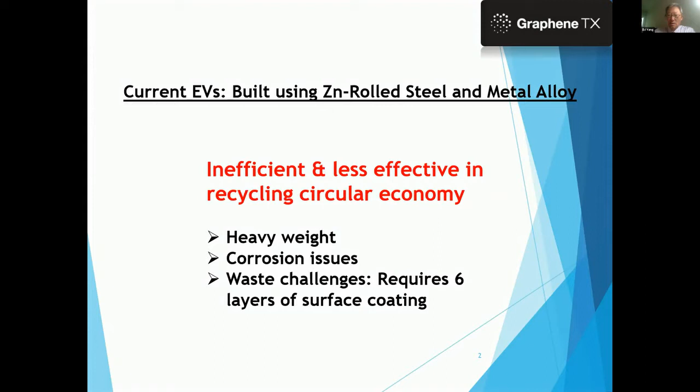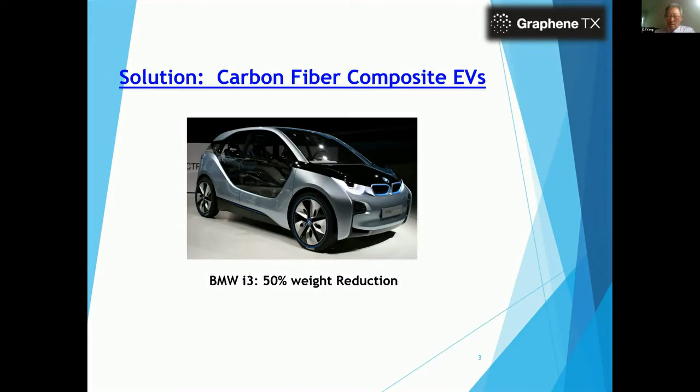So it's not really a recycling circular economy yet. There's a solution. This is the BMW i3, introduced I think a few years ago, around 2013. These are carbon fiber composite cars, and they said it is as strong as steel, and also it's lightweight.

Since it's a 50% weight reduction, you can improve battery mileage twofold since you are reducing the weight by half. And also, since this is a composite car, you don't have to worry about corrosion, so it has a long use life. However, there are still problems.

It's high cost, especially due to the high price of carbon fiber. Epoxy resin is very cheap, but carbon fiber is very expensive. Another problem is using composite, the appearance is not that good, and also poor distinctness of image. I believe our product can solve these problems.

So this is the way to solve the high cost carbon fiber problem. As you know, since PAN-based polyacrylonitrile-based carbon fiber was introduced in the late 60s, every carbon fiber manufacturer is in a way using PAN-based solution spinning to make carbon fiber. It involves 6 steps, and also requires high investment.

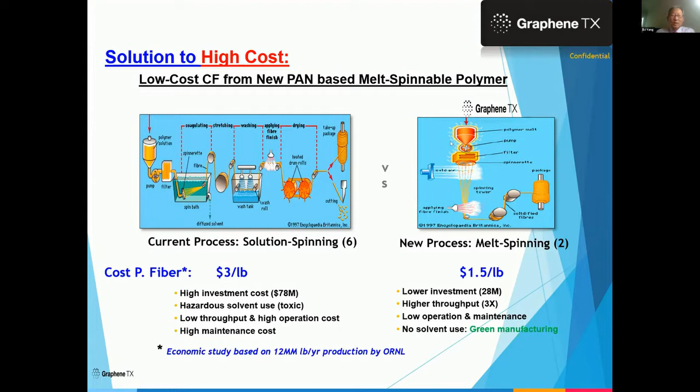Here I just want to show ours, still it's PAN-based, but we have an additional monomer. So I'd like to show the melt spinning here. This is just a laboratory unit. Of course, next stage, we will do multiple filament melt spinning, probably at Oak Ridge National Lab.

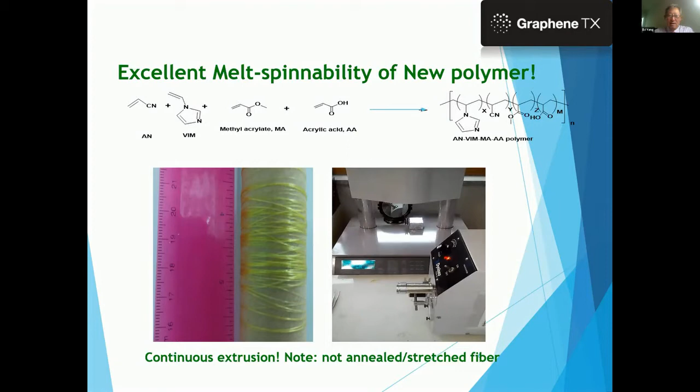Then you say, why is it melt spinnable? Because we developed the technology to create a so-called glass transition temperature. Regular copolymer PAN or PAN polymer they use, they don't have a Tg. But as you can see here, it's reproducible, and we have a glass transition temperature at 95 degrees C. So we have 2 different phases, and that's why we will be able to melt spin.

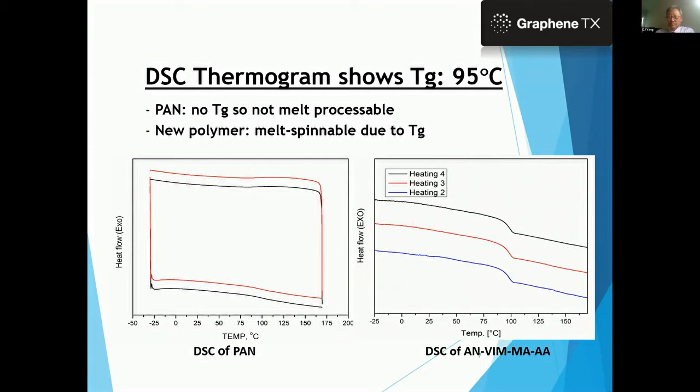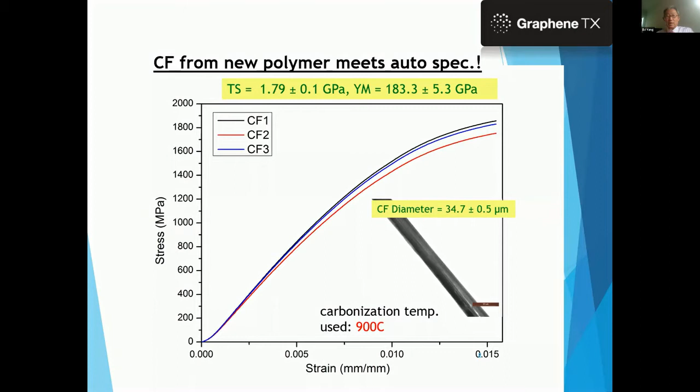So as you can see, we can handle the high cost problem, but the second problem, the reason why it has a less appealing appearance as well as poor distinctness of image, is due to moisture. Composite compared to metal loves to absorb moisture, and also polymer has UV sunlight damage, and also polymer is not conductive, so they are static.

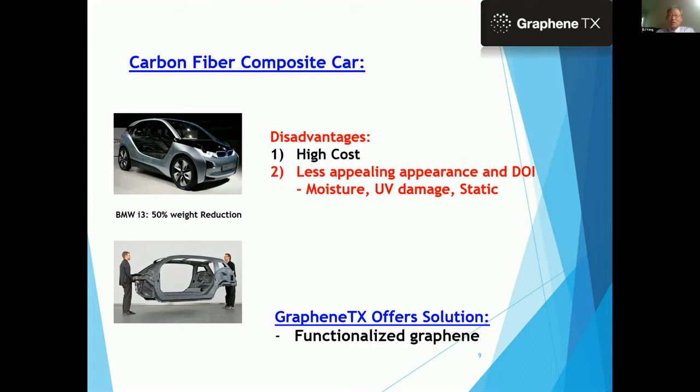So I will show you we can alleviate some of this problem, or we can solve this problem. We need to develop lots of data, but I'd like to show you the preliminary data. As you can see, if you add just 1% aminated graphene epoxy, you will see an increase of hydrophobicity.

Theoretically, 1 gram of graphene can cover 2,630 square meters. So if you put it in the composite, there are multiple layers of graphene, and they will protect against the moisture problem.

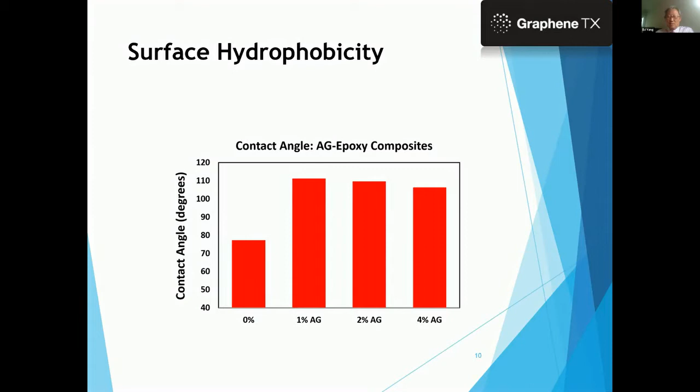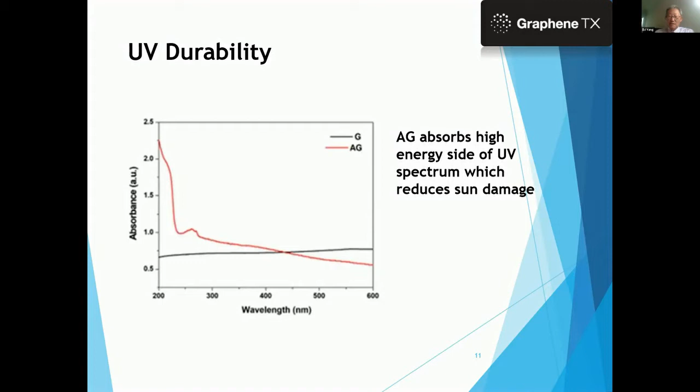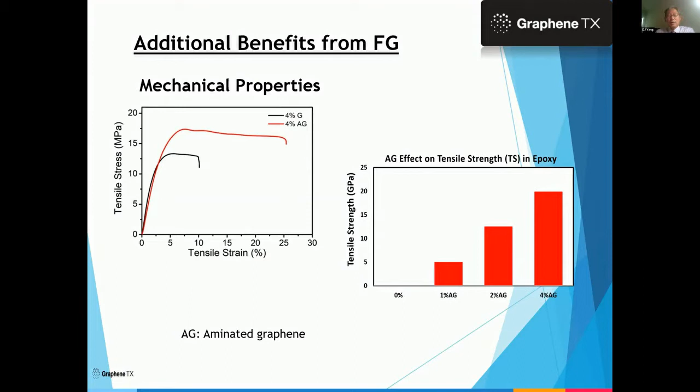If you just use pristine graphene, it is just a physical mixing. There is no chemical bonding between graphene and epoxy. But if you use aminated graphene, the amine group reacts with the epoxy group, there is a ring opening, and then it forms a carbon and nitrogen bond. So it gives you a strong chemical bonding we call covalent bond. That's why it enhances mechanical properties.

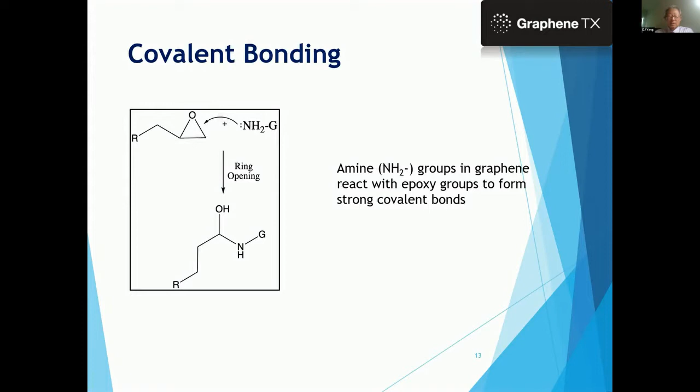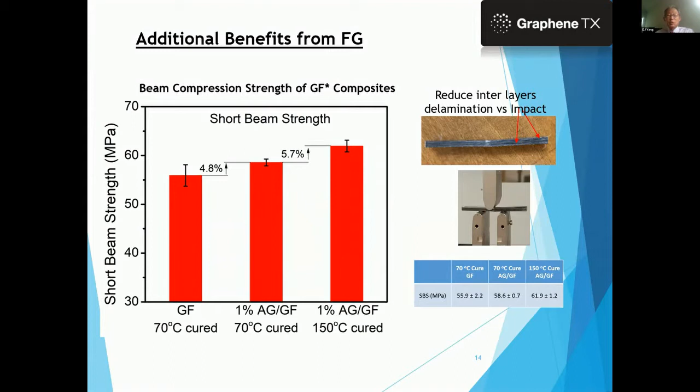Another test we did is the so-called compression strength test. We add just 1% of aminated graphene in epoxy. In this case, it's glass fiber. As you can see, by adding only 1%, you can increase the strength by 10%. That means we will be able to use less fiber when you make a composite.

I already mentioned that by using low-cost carbon fiber precursor, we will be able to solve that high-cost composite problem. Another one is the less appealing appearance problem.

By using aminated graphene, we can solve that. As shown in the mechanical property data, it will enhance the strength. So using low-cost carbon fiber and aminated graphene composite, you will enhance these items. It will be even stronger and even lighter. And since it doesn't absorb moisture, you will have a longer use life of composite cars.

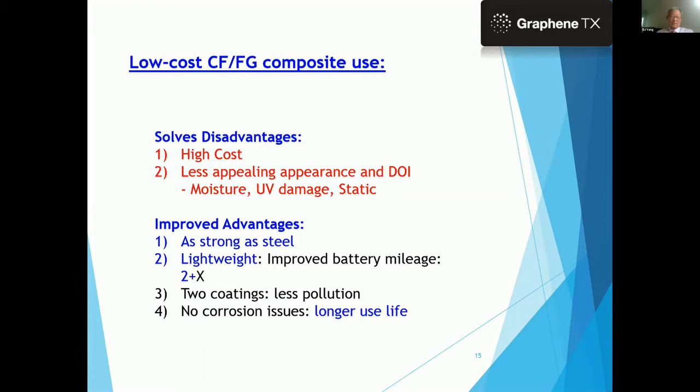So our product can be used in many applications. Currently we offer low-cost carbon fiber precursor technology. We finished a proof of concept in the lab, and we are formulating the next stage by working with IACMI and Oak Ridge National Lab. But currently we are selling aminated graphene, aminated CNT, and alkylated aminated graphene CNT.

Alkylated amine, especially long chain hydrocarbon alkylated amine, is good for non-polar plastics such as polypropylene, TPO, or EPDM, so they can mix well. Also aminated graphene can be used with epoxy resin, as I showed, but also with nylon 6,6 or nylon 6, because that amine group promotes hydrogen bonding. So there are many applications.

As you know, especially offshore wind turbine blades need to be longer and lighter. I was also told that currently the tower is made out of steel, but if they use composite, it can last more than 50, as the engineer told me, it can last 100 years. That means we will have a real saving of maintenance.

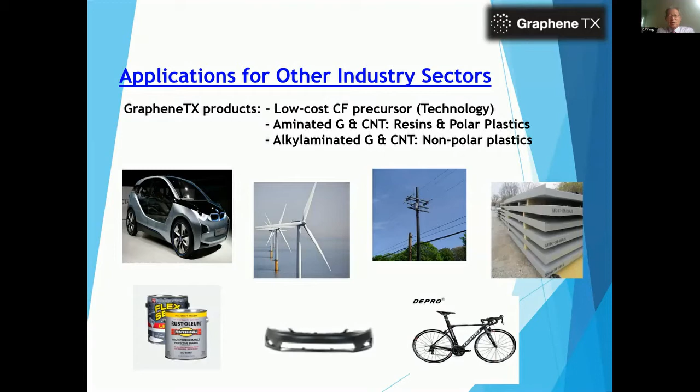Also, if we use this material, low-cost carbon fiber composite with graphene, it can be used in infrastructure and construction. I'll show two examples: utility poles and bridge decks. They can last longer because graphene can be used in other products as well.

So what we are going to do, as I told you, we are already selling graphene products. However, as far as the low-cost carbon fiber project is concerned, we proved it in the laboratory, and here's the next stage of what we are going to do. We are already communicating with Oak Ridge and IACMI.

What we will do is produce a large quantity of polymer at UTD, do a little more optimization study of extrusion, and then provide a large quantity of polymer to Oak Ridge National Lab. By the time we've successfully finished, I believe we will be able to get investment.

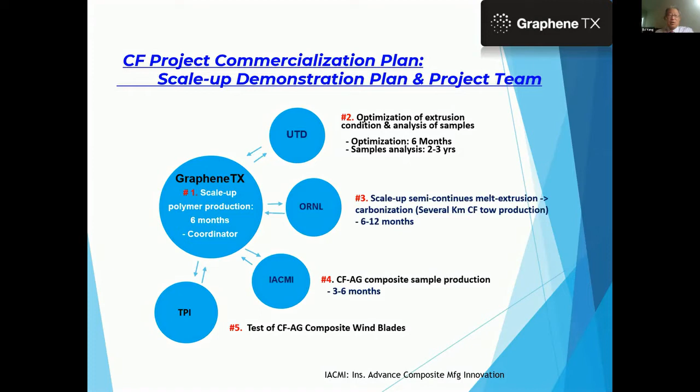Of course, with that carbon fiber produced from Oak Ridge, we can make a composite, and that carbon fiber composite prepreg can be tried with TPI and other automotive companies as well.

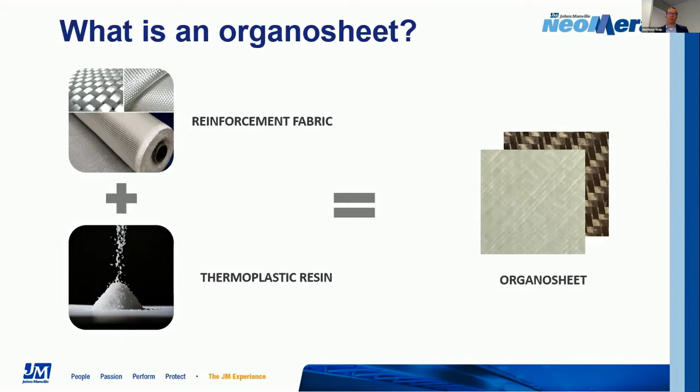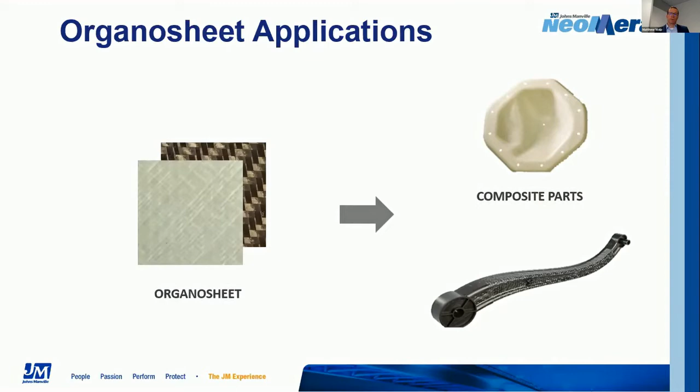And these sheets can be used and processed in a number of different ways. Just as a few examples, you can thermal form them into some sort of standard shapes, and then you can injection over mold them. In this case, the injection over molding process utilizes the organosheet as sort of a structural backbone of that injection molded part. Often injection molded parts can't be used in structural applications, they're either non-structural or semi-structural. This gets you into a more structural material by using all the benefits of injection molding to mold in sorts of features. But then that organosheet gives you kind of a backbone to the material to give it the stiffness or strength requirements that you need.

So what JM does is not melt impregnation for our organosheets. We produce our organosheets in a fundamentally different process, and the story of how we got there, I think, is interesting to share. I think JM is known within the composites industry for quite some time for producing rovings, glass fiber for composites markets. So as a fiber producer, we sell those on to other companies that are going to integrate them into their composite, whether those be thermoplastic or thermoset composites.

And so for a lot of that time, we've been working on sizing development for our fibers. That sizing development is tailored to certain processes and materials to help utilize and best process that fabric. And we developed a number of years ago a product called StarRov 886.

This particular sizing development was designed around the use in AP nylon systems. What we did is develop a sizing that had reactive groups on the surface of the glass to help promote polymerization at the glass surface. That obviously promotes the polymerization process, but also the bonding and the strength of the interface between the fiber and the matrix. So what you would get is the nylon would grow off of that surface, and you get a very strong bond.

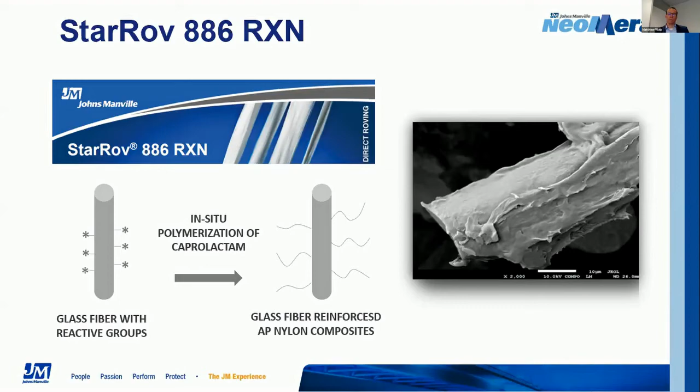This was mainly designed for the RTM industry. With that caprolactam-based system, you've got some reinforcement, and then you've got the resin system. Those are mixed inside of a mold, and you get the polymerization inside the mold itself, and then your part comes out of the mold. It's a very interesting process.

We still sell this material into that application today, but it does bring some challenges. Number one being our part producer, or in many cases our customer, is doing the resin chemistry in their process. For some that can be very doable, and they've developed the capabilities to do that. But many part manufacturers don't have that capability. They don't have that chemistry background, the ability to handle that within their facilities. They're very strong on the part production, but the chemistry side's not so much.

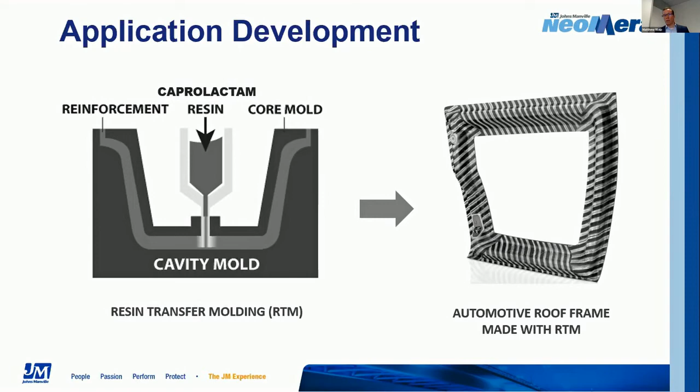So as JM looked at how this technology would grow and how we could potentially do more with it, we started looking beyond just selling it in the RTM space and maybe doing it on our own. This is where we introduce our composite technology, our thermoplastic organosheet technology.

If you're familiar with the RTM process and how AP nylon is produced in that process, first of all, we're running at rather lower temperatures from a thermoplastic standpoint. So right around 90 to 100 degrees C is what we're handling the resin system at. And the resin system at that temperature has a very low viscosity.

It has basically a water-like viscosity to it, which has a huge benefit when we start to think about application into the reinforcement. I use the analogy pretty regularly that if you have a fabric like a jacket or a coat and you pour water on it and it just sort of soaks out the fabric, that's what's really enabled with using such a low viscosity system—that full wet-out of the fabric.

And then once the resin system is within the fabric, it's polymerized into the nylon. So it's nylon 6, a very common, well-known thermoplastic material used in many different places. For our customers and people who use the product, they're not going to really notice any difference between that and a melt impregnation from a polymer standpoint.

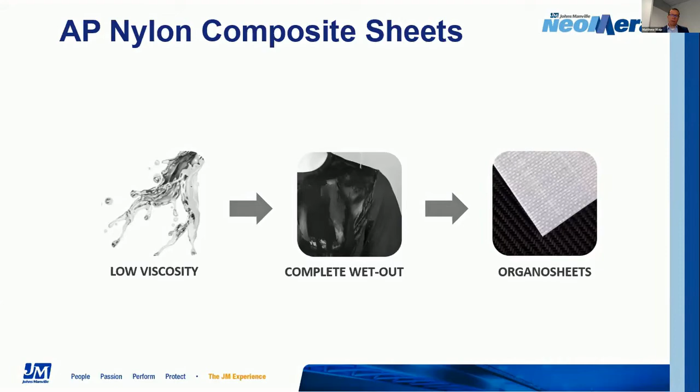Maybe the only benefits would be on the positive side. So by applying that low viscosity system to a fabric, it's then polymerized, and then we produce our Organosheet. It's a sheet-based product, so that's what we're producing, and it's a continuous process. We start from fabric, and it becomes a continuous ribbon of product that becomes an Organosheet on the other side. Then right now we chop those into sheets, and that's our product that we sell into the market.

And that's all essentially virgin AP nylon polymer, so it hasn't gone through any thermal cycling. So it's going to process very well and won't have that history that you would see in a melt impregnation process.

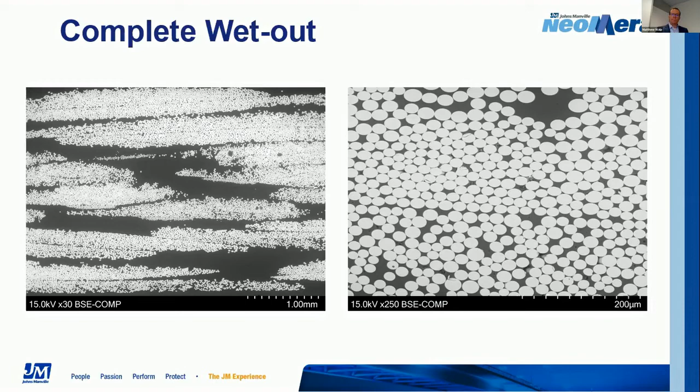So how do you use this? The big one is injection overmolding, which I mentioned at the beginning. I think there's a huge opportunity in the markets that are maybe not using as much injection molding as they are today, to use it now that it's a more structural material.

You can essentially functionalize an Organosheet with all sorts of clips, tabs, fins—those types of things—which often, when we think about the electrification that's happening in the industry, you're going to have a lot of electronic part integration.

And I think Organosheets, injection overmolded, will really enable that, and we've seen a number of opportunities there. So in that case, you take your Organosheet, it's heated, goes inside a mold that has this preformed to whatever shape, and then you injection mold around it, and then you pull it out of the mold. Injection molding is a very well-known process out there, so the addition of an Organosheet in that process is not a very difficult next step, and it really then enables that injection molded part to be a structural injection molded part.

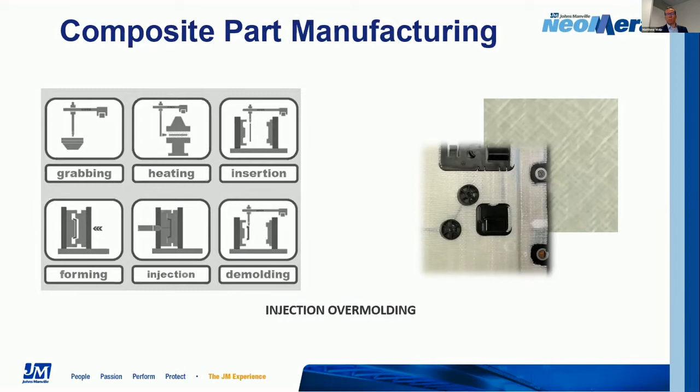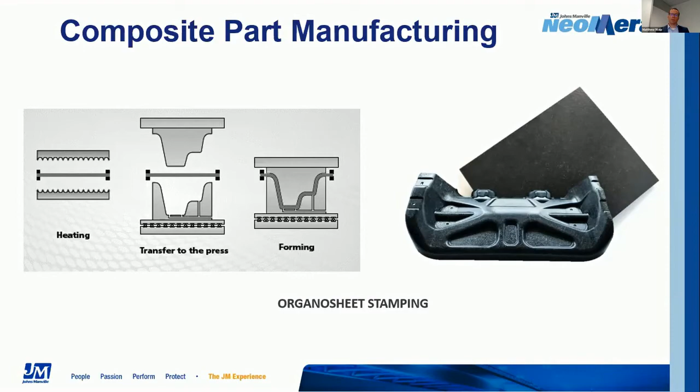So the story of the Organosheets, I think, is an interesting one for JM. Starting as a fiber company, thinking about how we can develop sizings for different customers, and then thinking, okay, maybe we can take that on. We have that chemistry expertise. How can we do that, but still make an intermediate material that then somebody else processes, producing our Organosheet? And so that story has been interesting for us to evolve into a full range of products.

We obviously are producing these Organosheets in our traditional fabric-based Organosheets like you would see today. These would be both woven and potentially non-woven fabrics. But our technology enables a whole number of other benefits as well. We can do quite thick fabrics in one shot. In a melt-based system, you may be able to make 0.5 millimeter sheets at one step, and then to get a 3 millimeter product, you have to lay up 6 sheets and reconsolidate those. And every step in that process adds cost. So in our fabric-based Organosheets, like the OS6 series, we're going to be much less expensive than competitors' products because it's a one-step process, both from 1 millimeter all the way up to 3 millimeter, which we've all demonstrated now.

We plan to go even thicker than that. It also can do quite high GSM fabrics, very dense, thick fabrics. The low viscosity of the system really lends itself to that full wet out. We also have our NCF series, which is an even more dense fabric. Our process really enables the use of NCF type fabrics, again up to 3 millimeters right now. We think we can probably do thicker than that into the future. And the benefit of those NCFs is just the unidirectional sheets laid on top of each other is going to really give you the strength and stiffness that you want for certain types of applications that require that.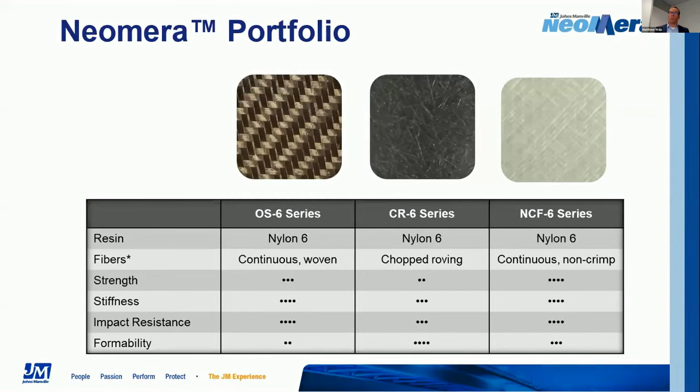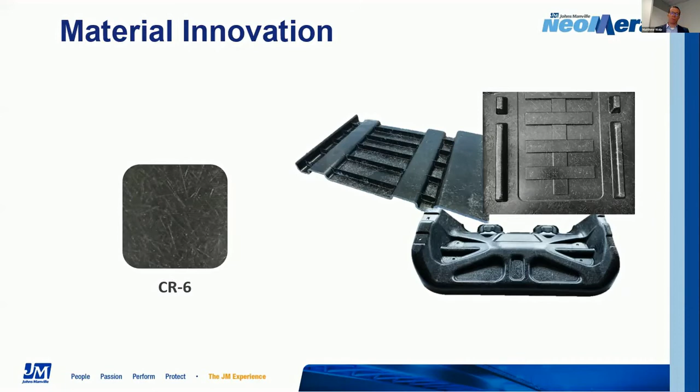So we actually see the CR series as kind of a game changer in getting composites into new applications, because for our customers, both from the processing side, the forming side, as well as the end use side, it's going to look a lot like sheet metal to them. If they're familiar and comfortable with forming and designing with sheet metal, the CR6 will enable that similar thing. And so you think of everything a stamping is capable of doing from a formability standpoint, the CR6 allows you to do similar things.

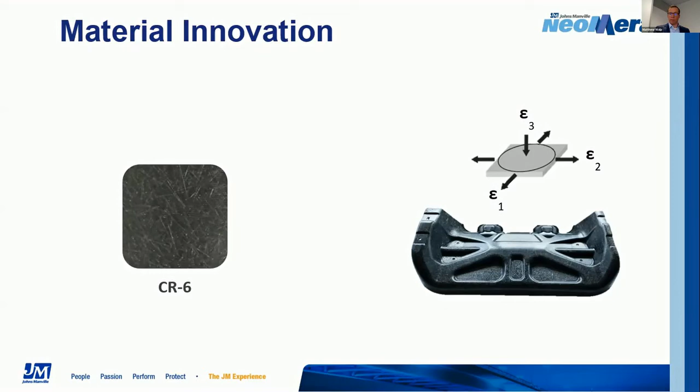The fundamental ability here is that you've got good strain distribution as you form that product through the thickness and surface of the sheet. That enables sheet metal forming that you see pretty common today, but now with all the benefits of a composite material, the light, obviously the weight benefits. I think that opens up a full range of applications in the body of a vehicle. If you look at every one of those parts in the car, a lot of those require a lot of formability to achieve.

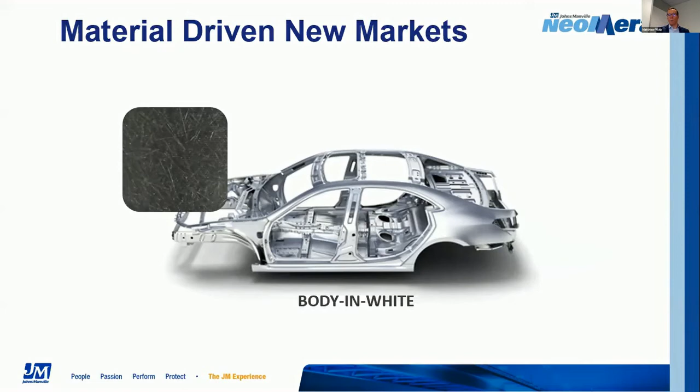With a traditional continuous fiber Organosheet, some of those are possible, some are not. But this really opens up kind of a full range of applications when you think about the CR product. And really these materials are not limited beyond temperature and those types of things for the application.

So happy to open it up for any questions.

I've got a couple questions, Matt. One is on the multi-axial, multi-layer. How heavy can you go in those sheets? How thick, or what areal weight can you get to? Well, in general, from a thickness standpoint, we've demonstrated between 1 and 3 millimeters today. We believe we can lower probably down to 0.5 millimeter on the thin side, and on the thick side we really haven't tested the upper limits. The GSM level is very high, like 1200 GSM type fabrics that we're doing.

On the CR series, that can be tailored quite a bit based on our chopping process. We're actually chopping in line in our process, so we can tailor that to go pretty heavy. We've demonstrated on the fabrics up to 1200 GSM fabrics, that's on a 1 millimeter thick product. So you just think 2,400, and then up from there as you go to different resins.

So what's the typical resin content or fiber volume, however you want to represent that, for these materials? We target 68% on the high side. Obviously we can do less than that, but that's what we've been demonstrating on the line today. That's 68% fiber by weight, so 32% resin by weight. Yes, by weight.

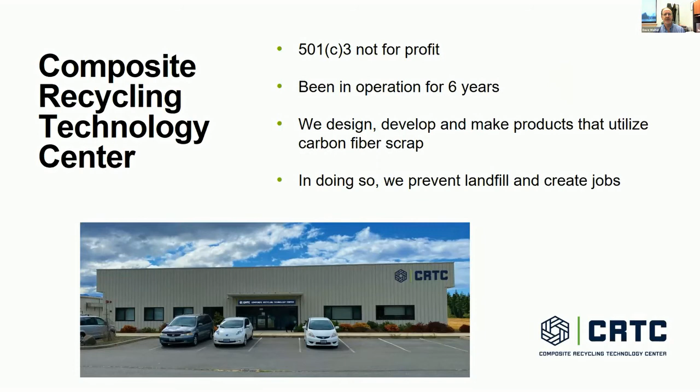When I give talks like this, I like to talk a little bit about megatrends. There's about 7 billion people in the world today. The UN estimates by 2100 there's going to be 11 billion. About 1 billion of that growth will come from Asia. The rest of the world stays relatively flat, with the exception of Africa, which grows from 1 billion people to 4 billion people. It's really amazing. Lagos, Nigeria is expected to be the biggest city in the world by 2100. It's hard to imagine, but that's going to be a big stress on the earth.

You think about how will 4 billion more people get fed, clothed, housed. I think it's cool that our industry, relative to carbon fiber, has the ability to have some influence on these things. If there are ways we can help keep stuff out of landfill, create jobs, and at the same time work on some of the big problems of the world, I think that's pretty exciting and a neat triple bottom line.

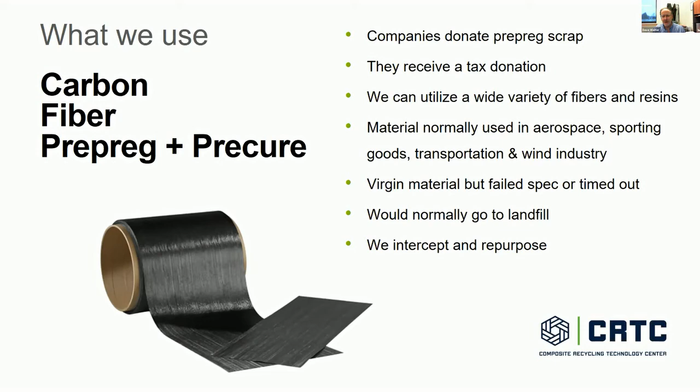We can use a wide variety of fibers and resins. Normally this material comes out of the aerospace, sporting goods, transportation, and wind industries, but it's virgin material that failed spec for some reason. So we intercept it and repurpose it. We're really about innovation - we come up with ideas of how to use this material and turn it into a product we can sell, and getting revenue from those products helps fuel our growth and keep us alive.

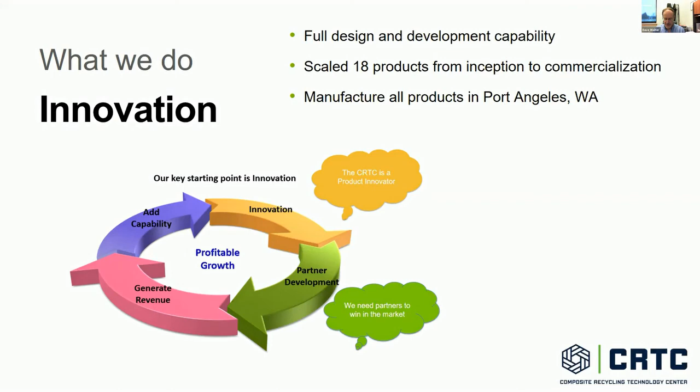We've scaled 18 products from inception to commercialization, and we make all of those products here in our facility in Port Angeles, as Dale mentioned. We've got 5 presses, a full machine shop with CNC to do all our metal work, a big 5-axis CNC, water jet, tube rolling, sheeting, slitting, chopping. It's a pretty good sized facility, about 25,000 square feet, and we're at about 20 team members - designers, engineers, and technicians.

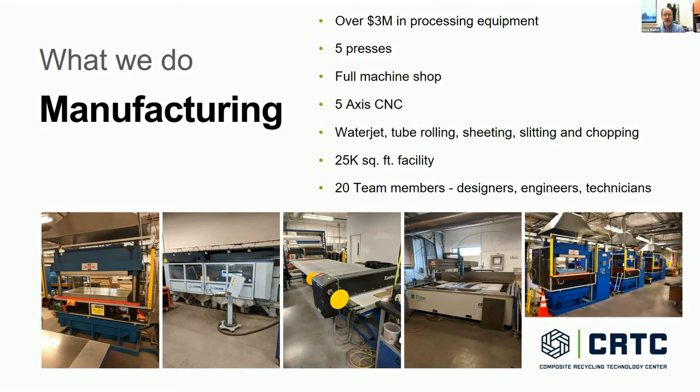You can see some pics of some of the equipment that we have here at the facility. So we have the full ability to design it, but then also manufacture it as well.

We make a camper panel for a high-end camper. We do a lot with chopped carbon fiber, where we chop it, press it, and make panels for aesthetics, things like knife handle blades. We also make full 4x8 sheets of material used for decorative aesthetics, a carbon fiber panel that might have a wood veneer on the outside, or be coated, or have powdered metal on it. There's a lot we can do with that, usually in the aesthetic space for commercial environments.

One of the development projects we're working on is our advanced cross-laminated timber, the ACLT. This is where we take thermally modified wood and put it into a CLT, but we integrate carbon fiber into that CLT. You can see in the picture those little black squares - those are rods of carbon fiber going the entire length of the CLT panel. Think of it like an integrated I-beam built into the wood.

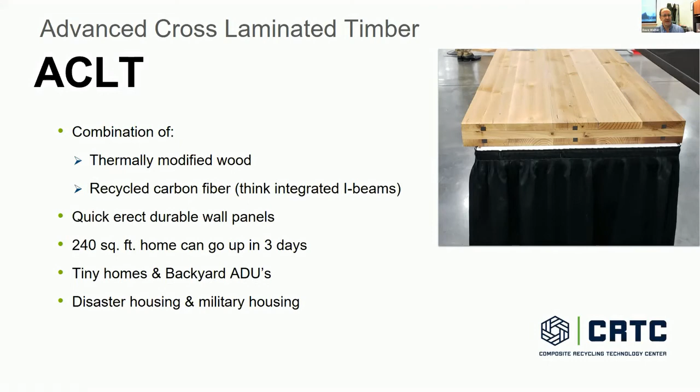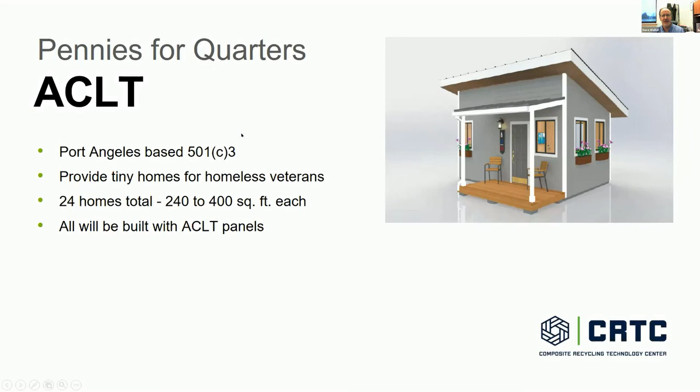One of the cool projects we have in motion right now is with another not-for-profit called Pennies for Quarters. We're working with them to build 24 homes using our ACLT system to provide housing for homeless veterans. You can see a picture of what it's going to look like on the right-hand side. This will all be made with our ACLT panels, so we're really excited about this. It's going to be a cool project and a neat way to give a hand up.

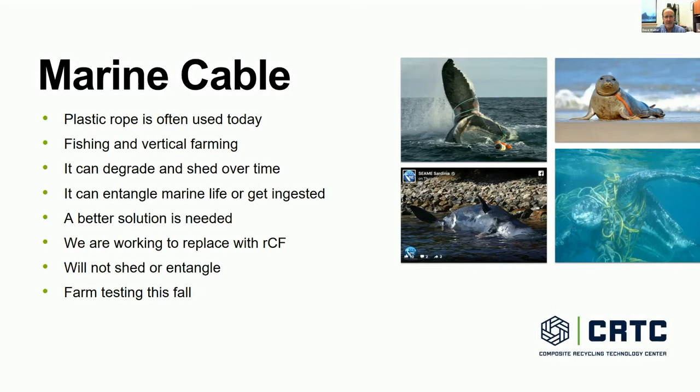One of the other developments we're working on is a marine cable. Plastic is often used today for fishing and vertical farming, but it can degrade and shed plastic over time due to UV exposure, and could entangle marine life if it breaks free. So we've been looking at a different solution using carbon fiber in that space. The nice thing is that it won't shed and won't entangle - the stiffness is such that it can't wrap around any marine life. We're right in the midst of testing this now.

This is a project we're working on with DowAksa. I really appreciate all of their help and leadership. We're taking spar cap material from them that would normally be in a windmill blade, cutting it down into very thin pieces or lengths, and using that as the grow line for vertical farming.

For example, in a vertical farm, at the very top of the water you might suspend macroalgae, seaweed, kelp. Underneath that you'd suspend a cage with mussels in it, and on the floor of the water another cage with oysters - all suspended in a column of water. It really helps having something very strong and very stiff, and carbon fiber works great in that space. We just went into the water at a shellfish farm not too far from Seattle, and we're excited about that and anxious to get it into additional applications as we go forward.

We're looking at different ways to help feed people with marine cable and vertical farming applications, house people with the quick-erect ACLT wall panels, help people recreate with our pickleball nets and benches, help people from a medical perspective with orthotic braces and pop-up medical clinics using our ACLT panels, and of course lightweight things to help reduce CO2. And we do all of that while keeping carbon fiber out of landfill.

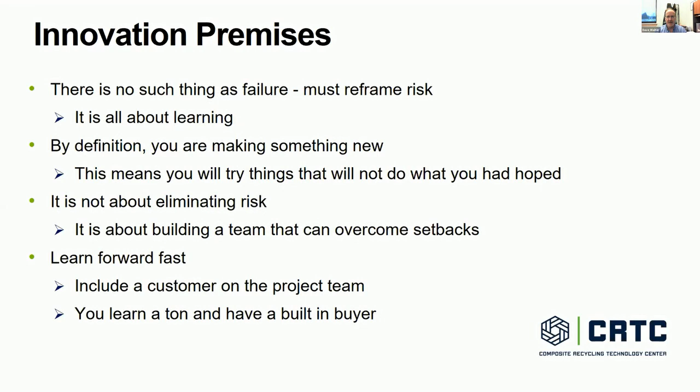So we make a lot of prototypes and iterate. As my friend Dave Banks says, if a picture's worth 1,000 words, a prototype's worth 1,000 pictures. I 100% align on that, I think it makes a lot of sense, and customers can get a much better sense of it when they have a prototype to work with and touch and feel.

We like to get lots of customer feedback, and we find it's really helpful. We get it across geographies and segments. What we really learned is what we think about it doesn't really matter — it's what the customer thinks about it in the end. But not all customer feedback is equal, and the skill is really knowing the difference there.

We also find that customers who pay give much better feedback, so we don't give any prototypes away — people have to pay for them. Then you really find the feedback becomes quite genuine, and you relentlessly learn from what the customers are telling you.

So in closing, innovation is hard — you all know that, it's really challenging. But to me it really starts with hiring. I think we had an advantage being a startup, where we've been able to scale with innovation in mind and look for people we felt would help us in that space.

I've also seen that innovation can be killed by bad culture, and as a leader you get the kind of culture that you allow. So I spend a lot of time as CEO on culture. I believe that's a sustainable advantage if you get it right, but it takes a lot of time — it's not easy. We could get into a whole other talk on innovation and culture.